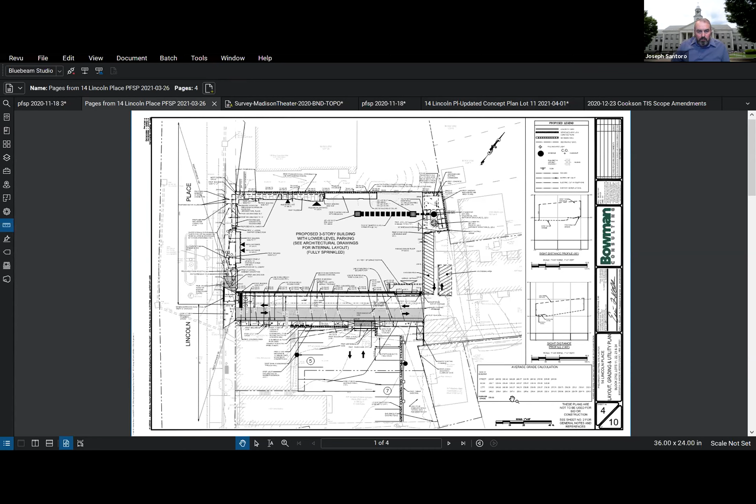I think all of that's shown on sheet 4. That's what I've been looking at as you talked. Can you pull that up? Here is sheet 4. I think that shows the two areas that Mr. Santoro asked about. Am I correct? Yeah, that's fine. I can look at both of them, but I just want to understand where the new trash enclosure exactly is going to be relative to the building on lot 11 and the applicant's structure.

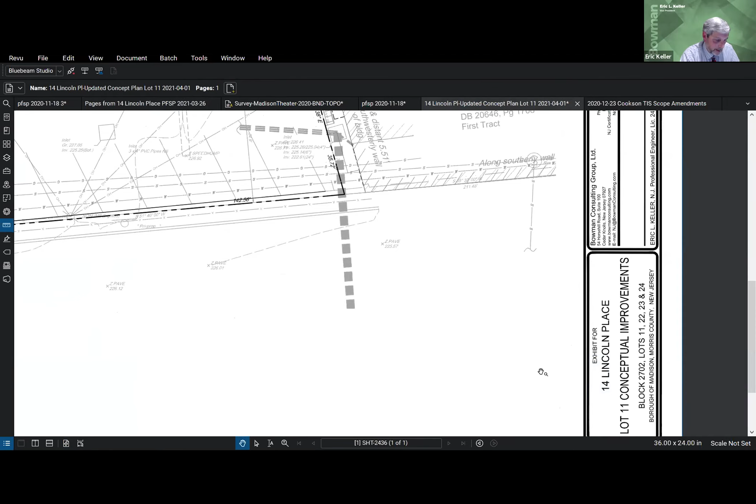Which is why I pulled up the other concept plan. Flip back to that. I thought it was right - that's shown here. At the time we made the submittal, we had not received sign off from Mr. Greco. So this is sheet 1 of 1. Okay, it highlights it. It's entitled Exhibit for 14 Lincoln Place, Lot 11 Conceptual Improvements.

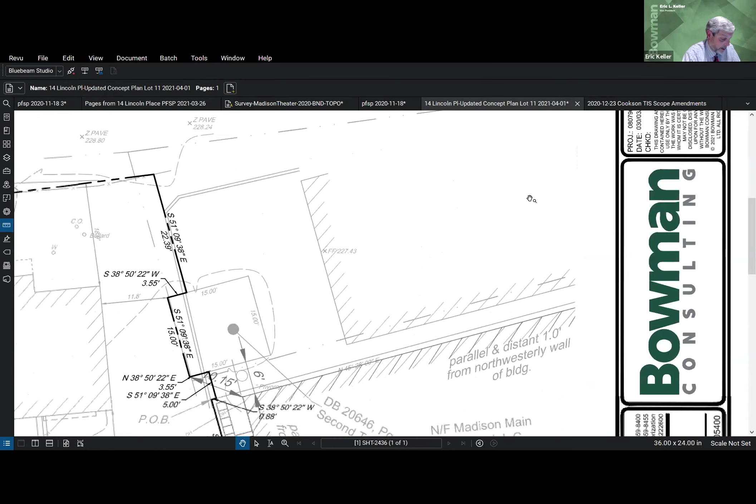Mr. Keller, will that be incorporated into a future revised plan set? Yes, sir. This sheet is dated March 3rd of 2021, and it is at a scale of 1 inch equals 10 feet, same as the rest of the site plans.

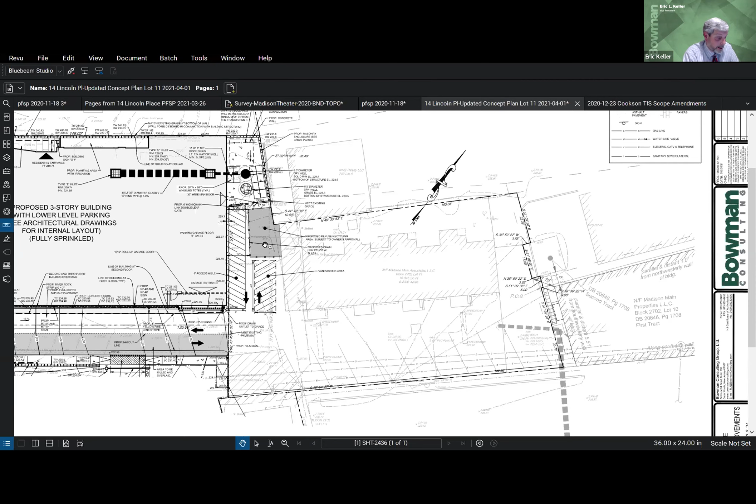This shows all of lot 11, which I'm highlighting with my virtual hand. Our building is located on the southern side, or the left side of the sheet. We have the 8-foot access aisle, the van parking area, and then this shaded area here is the enclosure for the refuse and recycling for lot 11. It is 3-sided, with a fence along the eastern side, the southern side, and up near the enclosure itself. This area is of sufficient size to accommodate the cans and containers that exist at the back of the building.

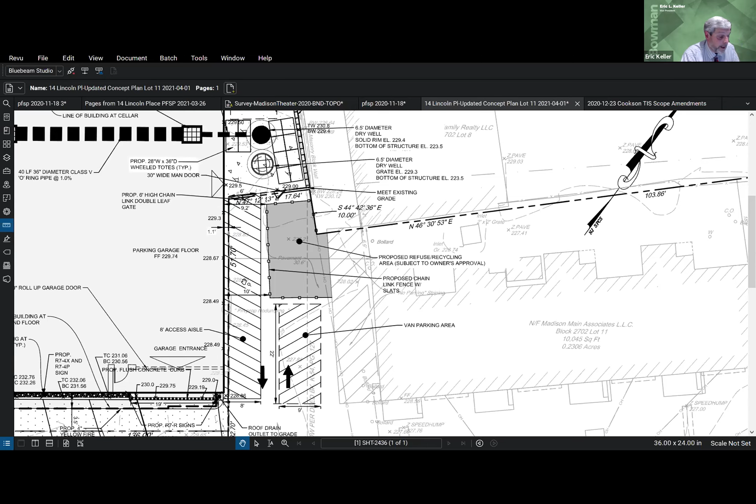Mr. Chairman, you wanted to look at the other plans that we submitted? Oh, I'm sorry, yeah, I just want to get a read on what's likely going to look like now that Mr. Romanelli has given you feedback, just to make sure I understand what's going to happen, what's not going to happen there.

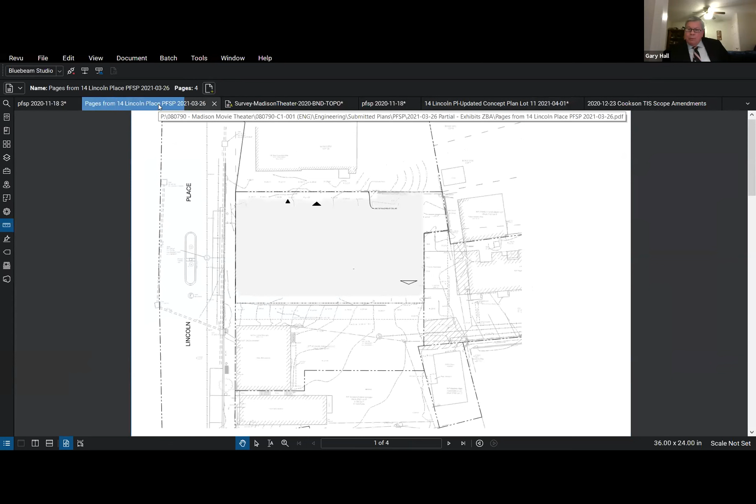Okay, Mr. Chairman, I'm sorry. Mr. Hall, should we mark this as an exhibit, or are we just going to submit it? We're going to submit it with another submission, and it will be in advance of the hearing in compliance with the requirements. I assume it will be reflected on revised sheet 4, wouldn't it? Yes, it will, because that's our record copy of plans, and if it's changing, it should go there.

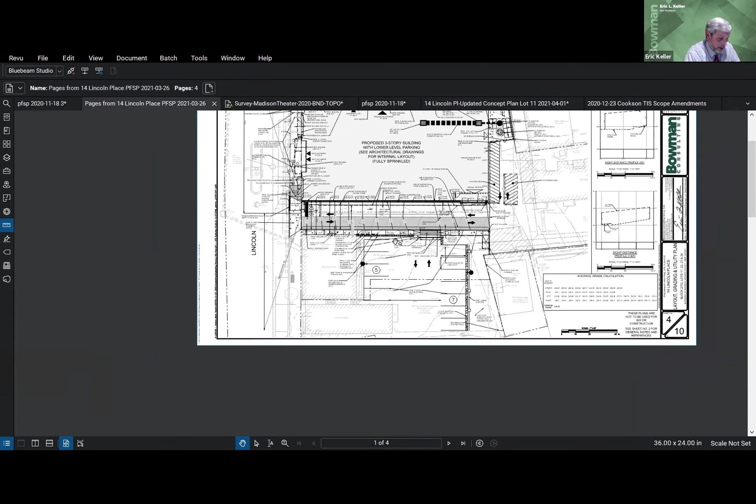Ultimately, okay. So let me zoom in on the parking here. This is sheet 4 of the revised plans that were last revised March 26th.

The property line is this heavy line here, which is adjacent to the building. There are the existing asphalt and broken asphalt extends pretty much up to the property line. There is a concrete sidewalk along the side of the dwelling on lot 12 that encroaches onto Mr. Romanelli's property. It apparently has been there for some time.

But this area that we were looking to create some open space is currently used for parking. What Mr. Romanelli is seeking is that this parking area basically be returned to what it is today and allow him to continue to park in this area up to generally the limits of today.

Would that be stacked parking? How would that work? You show 7 spaces, that'd have to be all reconfigured, I take it. Yeah, the access location would not change. Currently, if you go out there—we were out there yesterday—there were some vehicles that are stacked in tandem parking.

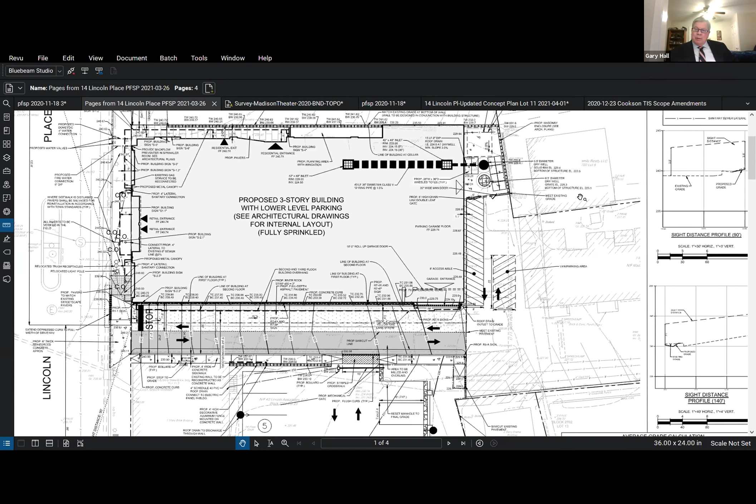And Dennis, while you're talking, the changes down by 21 and 22, they would seem to impact on the stormwater management. I forget where that was left off, but on that.

The stormwater management as proposed is that infiltration trench that Mr. Keller referred to, that is going to remain. We're going to still have an infiltration trench, which is more than what we have today. It will be relocated with the guide rail to follow the existing edge of pavement at Mr. Romanelli's request, so that he doesn't lose any maneuverability and access to the paved area that he has currently. So we still will have an infiltration trench.

Okay. And as I understand it, we're also going to be directing a roof leader from, I guess it's the salon, which Mr. Keller was up there, that dark line at the dash there, which currently discharges overland onto the pavement. And we're going to be piping that into the infiltration trench to aid and increase the groundwater recharge and keep more of the stormwater off of the pavement and eliminate any icing possibilities.

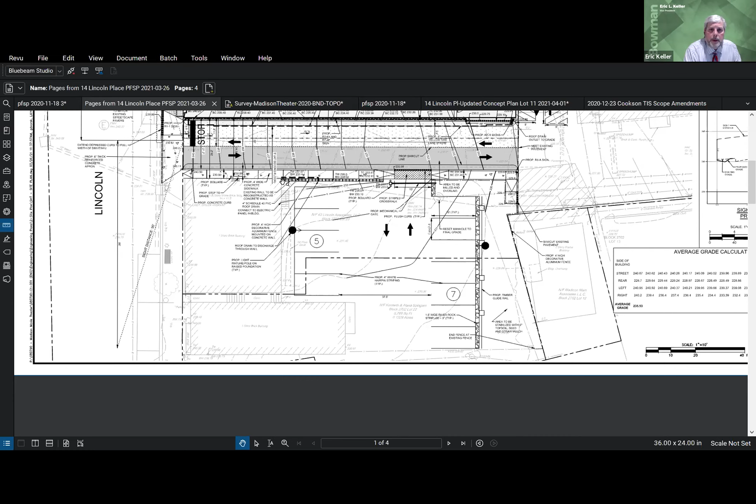Okay, thank you. And I think, was it said, Mr. Keller, that they were going to do a drain on the driveway, the bottom of the driveway? Did we say that? No, Mr. Harrington and I discussed that yesterday about putting a drain here.

We discussed, we didn't think it was a good idea to take driveway water, bring it into the building and have it come back out. We are taking the roof leaders for the entire building into this interior pipe storage, so that as it exists today, what sheets down this driveway will continue to sheet down the driveway onto lot 11. The issue here is that there's really very, very limited drainage structures in the area.

Okay. You concur with that, Mr. Harrington? Excuse me, Mr. Chairman, I had to unmute. It is still a request of mine.

I understand Mr. Keller's concern, which I get from every builder. They know that it is really not recommended to take water from outside and put it into a building. I would like to keep the discussion going with Mr. Keller. We are widening that driveway, we're regrading it and improving it. And yes, that's where the water does go today. But whenever you repave and curb an area, it might lend itself toward either concentrating the flow or nominally increasing it.

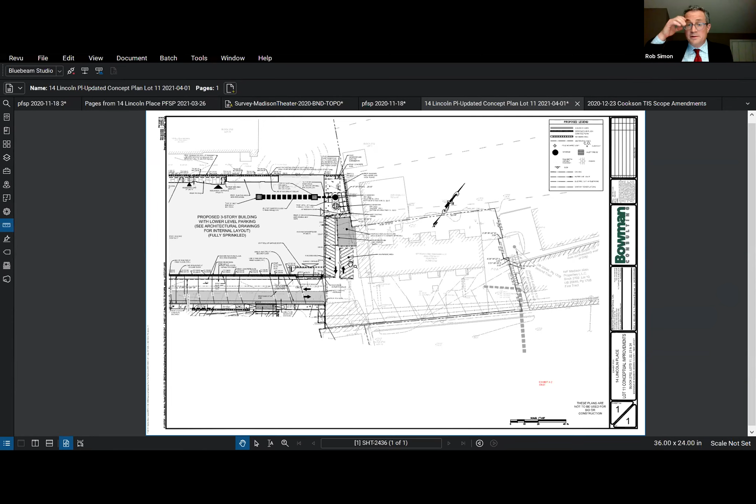I'll just ask you, Peter, is that a recorded agreement, or? I don't recall.

Mr. Keller, other than the van that's parked on lot 11, are there other vehicles affiliated with lot 10, British Home Emporium, that are parked on lot 11, whether it's employees, guests, visitors, or deliveries? I don't know who parks on lot 11. There's no designation or anything.

Do you have any knowledge as to where lot 10 British Home Emporium employees, guests, visitors, or deliveries park? I don't.

This may be a Peter question. Given the passageway under the lot 10 building, British Home Emporium, is there some sort of easement agreement for vehicular ingress and egress or parking between lot 10 and lot 11? I don't know.

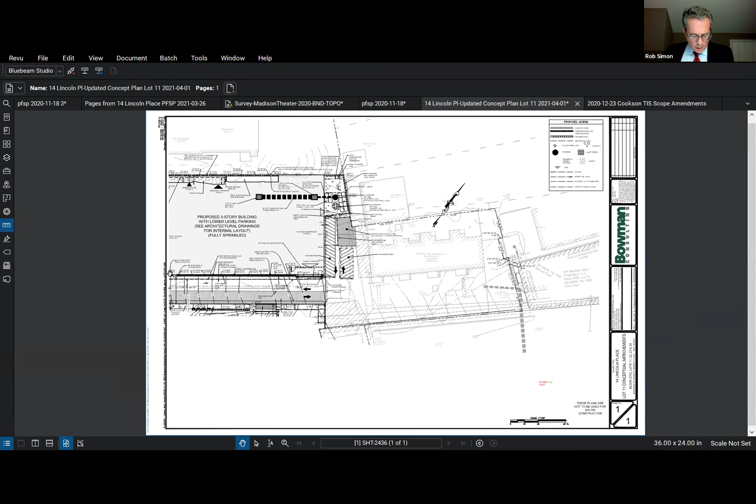And with regard to, you talked about the tandem parking on, I guess that's lot one, is that lot 22, or is that lot 23, or is it both? Let's get, I guess I'm done for now, subject to the caveats I stated earlier with regard to A2, but that was helpful. Thank you, Eric.

You're welcome. Can we go back to sheet 4 that you submitted most recently? I think it's March 26, 2021. Yes, I have sheet 4 on my screen. Right, and understanding that I'll reserve other questions once I see a revised plan.

I just wanted to get a general idea based on the testimony you've provided so far. With regard to the tandem parking that currently exists, which Mr. Stern commented on, does that extend to both lot 22 and lot 23? Yes. And you're not aware whether either property owner received any type of approvals or otherwise for that tandem parking, correct?

I don't know. And you don't know whether tandem parking was ever permitted or regulated one way or another, correct? I don't.

Now just getting back to some of your prior testimony, I think you stated earlier, and you'll correct me, I'm sure, that the Residential Site Improvement Standards, or RSIS, is not the governing regulation with regard to this application. Is that what you said? Yes.

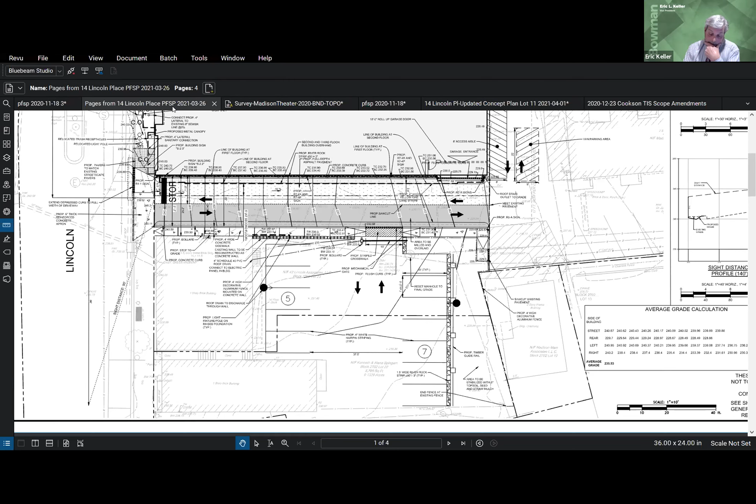First of all, just on my couple questions, we have now established with Mr. Keller, who is not only the engineer but also the traffic consultant for this application, that there are improvements taking place in lot 22, lot 23, lot 11, where we now know that lots 9, 10, 11, 22, 23, and of course 24, all have the ability to utilize this new 30-foot two-way ingress and egress to and from Lincoln Place. I am asking questions that go to internal circulation for all of these lots, including deliveries for all the lots and where they take place. I learned for the first time tonight that there's some sort of easement agreement that allows lot 10 to park a van on lot 11, and that we don't know whether it's one way or two way.

The arrow says one way, but the representation based on an OPRA request is that it's two way. So this is a site - this is not just a D variance application with a lot of C variances and waivers, but it's also a site plan application. And one of the issues with regard to a site plan application, as we all know, is adequate ingress and egress.

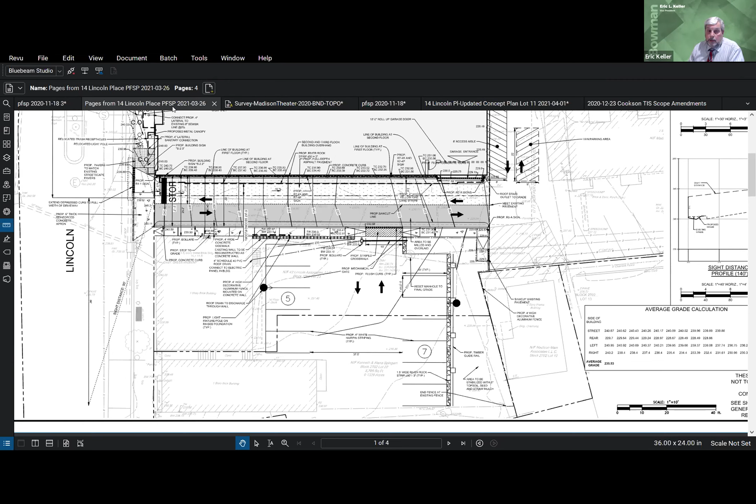We have not discussed that with the borough. And let me then move on to, so on your site plan, Eric, when you put together, and I apologize, hold on a second. I think I don't know if it's 2 of 10 now, Eric. I have 2 of 9 in your zoning schedule. It will be 2 of 10, but the plans that are currently before the board, sheet 2, it's sheet 2 of 9.

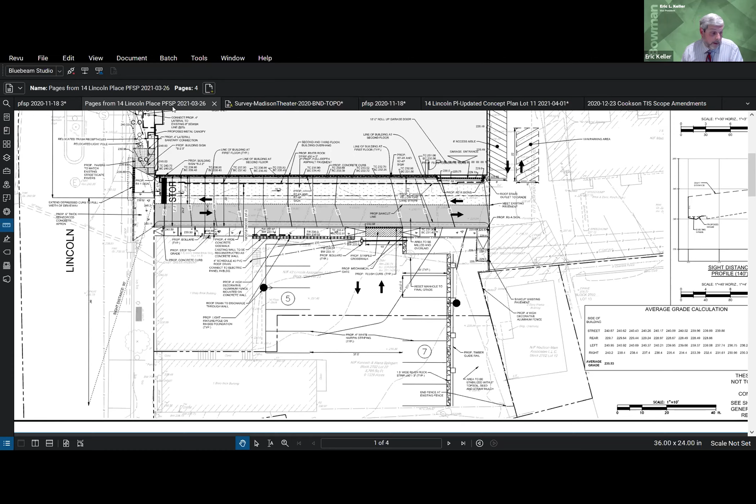So you provide bulk requirements for lots 11, 22, 23, and 24, correct? Yes. And with regard to lots 11, 22, and 23, you have as existing use NA or not applicable, right?

Do you know if the uses of lots 11, 22, or 23 are conforming or non-conforming? With regard to your zoning table, you have a bunch of what I'm going to call delineated as E next to certain numbers for lots 11, 22, 23, and 24, representing existing nonconformity. Did you do any type of research to determine whether those numbers you identify as existing nonconformity are legally valid as predating an ordinance that made them in violation?

No. Chairman, my objection is it's an irrelevant line of questioning as to existing conditions, decades-long configurations. If these properties, which are clearly in play based on testimony and zoning tables that the applicant went to great length to identify, if he's saying certain measurements represent existing nonconformities, I want to know whether these are legally permitted as predating the ordinance that made them in violation, or whether they're just currently in violation and have been around for a while. Because there's a legal difference in terms of whether variance relief is required.

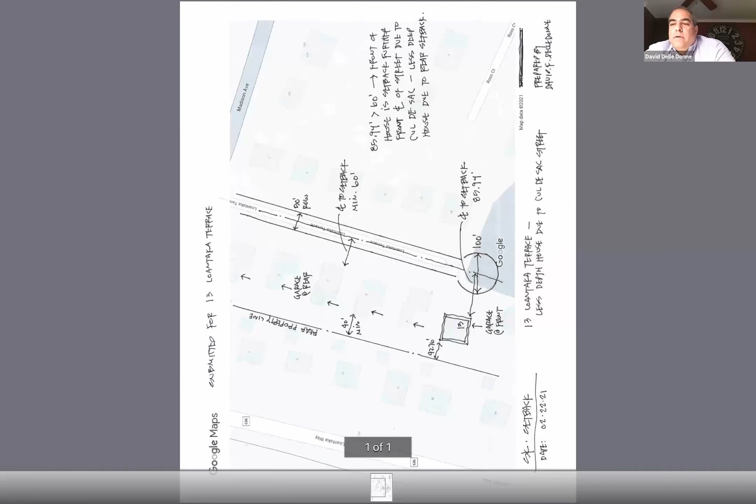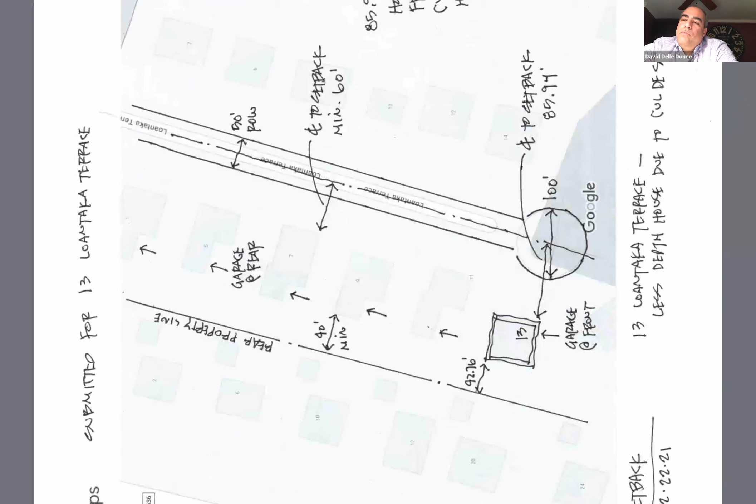If I could bring up one other, I will share one more. And that would be this diagram. So what I tried to do is the property in question is number 13 on the right, and that is directly off the cul-de-sac. And what you can see is the house is set back almost 25 to 30 feet. The actual calculation that I did was a difference of 29.94 feet. So the front yard setback is a lot different because they're on the cul-de-sac.

So that actually gives them an odd shaped property. It gives them a hardship in terms of comparison to the neighborhood. And it does give them a restriction on the rear yard. So the area that we're adding is essentially the third part of the house, where one part is the garage, one part is the living space, and then typically on the other houses, the third part is the front living space. But in this case, the Canforas would be creating that third living space in the back rear yard.

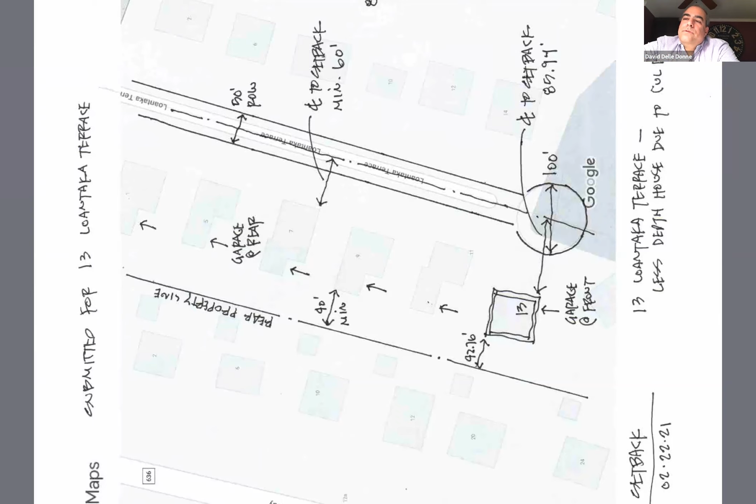So I'm going to stop sharing this unless anybody has any questions for it.

So because they're on the cul-de-sac, it creates a condition where the lot forces their house to be set back on the same depth as the other properties, and therefore is restricting their rear yard. We tried to portray that on those two exhibits or photograph samples. We think, though, even though the house gets deeper, it's the open patio situation where there's a lot more light, and it's not a full structure with walls, so I don't think it's as obtrusive as it would be if it was a true addition.

Just some other things to touch on. Again, we're in an R3 zone. We did look at potentially detaching it, and we thought detaching it would be more restricted in the rear yard. It would be more of an eyesore as a detached structure. Because we're on the cul-de-sac, the lot shape, as you can see from the as-built that is submitted, is certainly a little restrictive in terms of the cul-de-sac pushing the front yard further into the property.

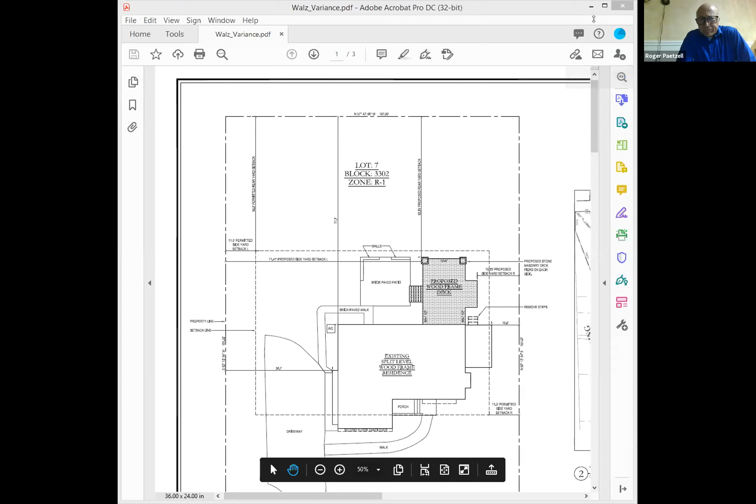Okay, why don't we go right to Mr. Bruno? Why don't you show us your plans, etc. I'm going to share my screen. Can everyone see my screen? Yes, the site survey? Yep.

Okay, so thank you again for allowing us to present tonight and doing it so late. We're here asking for relief for impervious lot coverage for a proposed deck on the rear of the house. It's located on the rear right corner. Currently the property is already non-conforming to the amount of impervious coverage by a small amount of 3.36%. By adding the deck, it doesn't increase our impervious coverage. The impervious coverage remains as is, with no net increase.

A few years ago I was here for a similar application right around the corner in the neighborhood, for Laurel Way and Treadwell Avenue. Part of the problem is this area, as mentioned at my last hearing, the permitted lot size is 25,000 square feet, but the property is well under that, at 16,159 square feet in the zone.

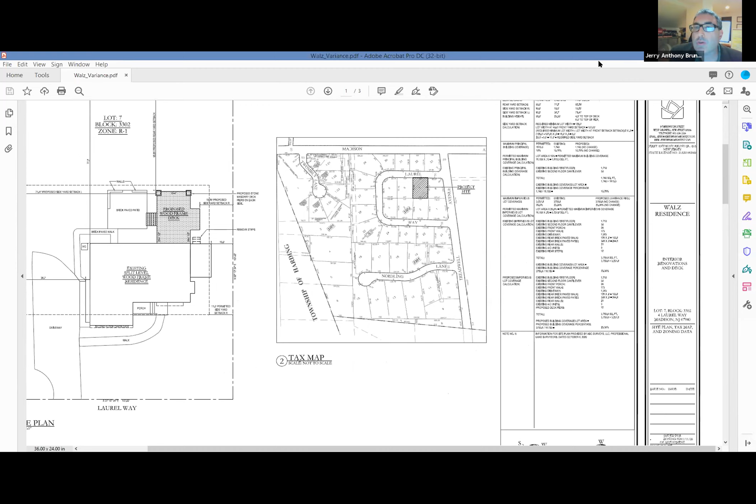I'm just going to scroll down to the floor plans. As you can see, our deck is in the back right corner, and due to the house being a split level, this deck allows us better access to the rear of the house from the kitchen split level. We're also going to do other improvements: one is renovating the kitchen, two we're adding a double slider door to the deck, and three we're renovating the sunroom, reconfiguring windows in the sunroom.

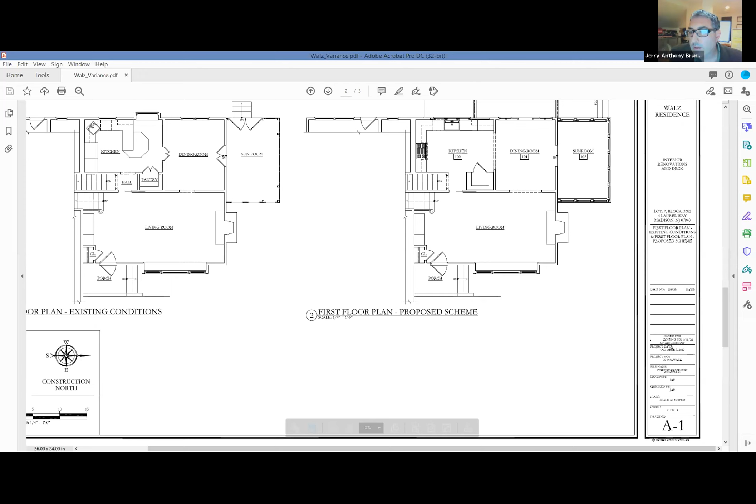As you can see on the back of our house, our deck area and on the sides, the deck is anchored by a couple of tapered stone piers to give it some architecture, with some lanterns on top. You can see our access point from the double sliding doors, and then our improvements to the sunroom with our windows, and we're going to do a nice recessed panel system. The deck conforms to all our setbacks and to all our heights.

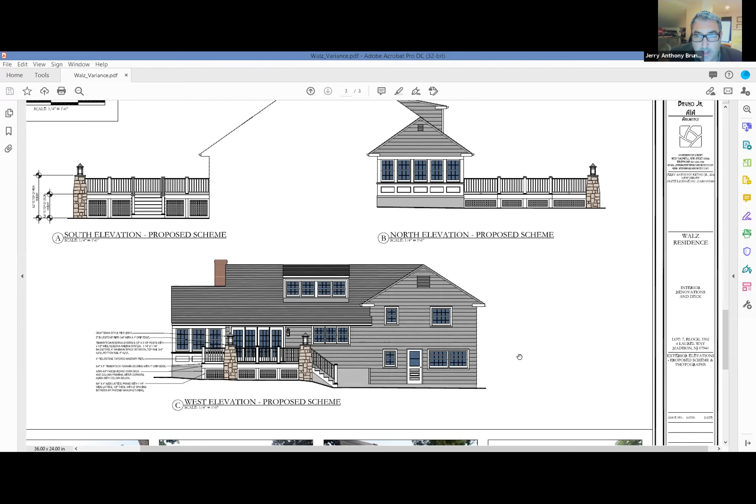And again, we're asking relief for the impervious coverage due to the site already currently being over by that small amount. And I'm going to stop my screen, and that's pretty much concludes our presentation.

Hey Gary, now remember in that group of homes where it's R1, but the lots are really not zoned right, we get one there once in a while, and I think a year or two ago the board did, in the annual report, specifically raise the question of maybe they should take a look at the zoning designation of this little neighborhood, because as I recall, all or nearly every lot was under the 25,000 square foot minimum. So probably by size it could have been an R2 zone instead of R1. As Mr. Bruno pointed out, the requirement is 25,000 square feet, and what exists is 16,159. So it's not even close. And without doing the math, it's clear that if they had anything approaching the 25,000 square foot minimum, they'd be conforming as to lot coverage.

And on that, real quickly, even though the deck does not alter or increase the lot coverage, because you're already over, the legal issue is: well, you're not making it worse, but can you make it better?